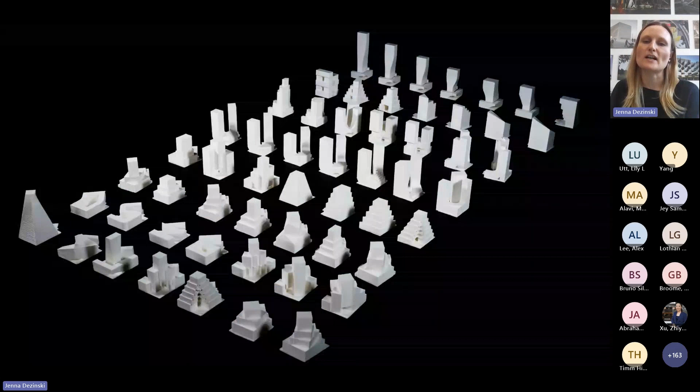I think this slide here is to talk about form giving, which is something that Bjarke talks about a lot. It's the Danish word for design, which means to give form to something that has not yet been given form. You can see here on the screen, part of Big's process is to iterate and test what it means to give form to different typologies.

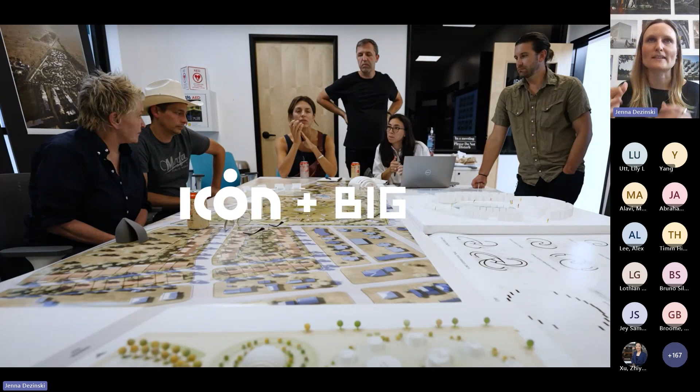With that in mind, I would like to start talking about our collaboration with Icon. Big has been working with Icon to explore what it means to give form to 3D printing for the last several years. I'm going to give you an overview of a few of our projects together. I've worked on a couple of them and not all of them. It's taken a large collaboration of many people here and many people on Icon's side and other experts. It really takes a whole group to get a project like these to fruition. So we're really thankful for all of our collaborators on these projects.

We'll start from the beginning, which is Icon's Project Olympus. This is the first project we really started on with Icon. It's a collaboration with Icon and NASA. Big has only been working on a portion of Project Olympus, but it's a collaboration on a lunar habitation, really imagining what a more long-term presence on the moon will look like.

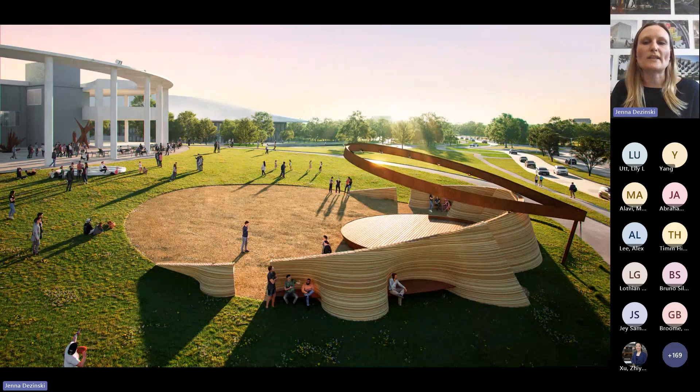Moving back to Earth, we designed the Cosmic Pavilion at the Long Center in collaboration with Icon and Liz Lambert. It was unveiled at South by Southwest in 2023. This project really showcased what Icon's 3D printers can do, creating an organic, undulating 3D printed wall that serves as a backdrop for performances. The wall starts from a wave-like shape at the bottom and ends at a pure circle, creating this undulating form that you see here on the screen and in the built final product. It also has this halo cantilever canopy that's used to support performances.

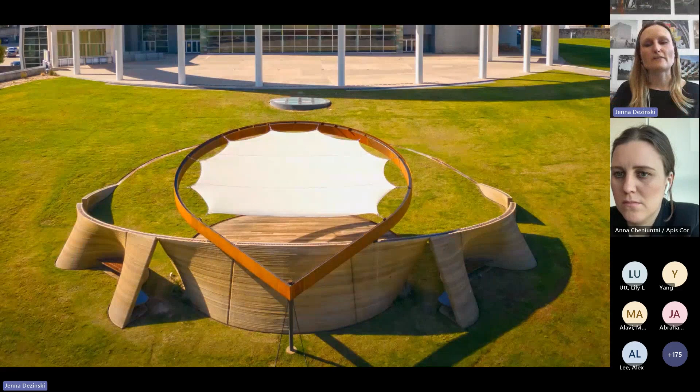Moving on, the pavilion you just saw was a precursor to El Cosmico, showcasing the unique and cutting edge 3D printed construction currently underway for El Cosmico in collaboration with Liz Lambert and Icon again. For those not familiar with El Cosmico, it's a hotel and campground located in Marfa, Texas, with an eclectic style and a very creative approach to hospitality.

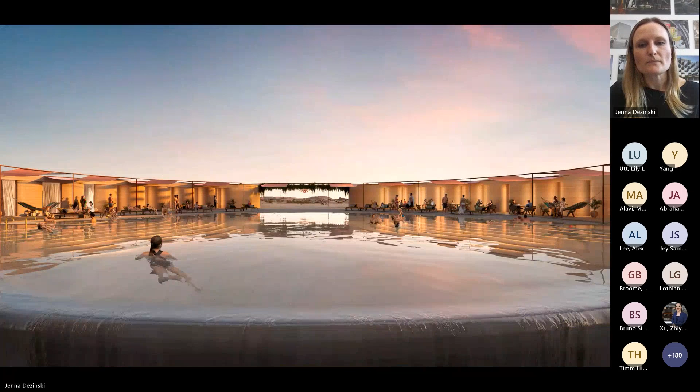So for us, we've been working with Icon and Liz on the relocation and expansion of El Cosmico to more than 60 acres that will showcase an entirely new architectural approach made possible by large-scale 3D printing, including domes, arches, vaults, and parabolic forms.

Also programmatically, what you see here is the new spa that will be there. There'll be new lodging, hotel lodging, new shared communal facilities still for camping, and a collection of Sunday homes.

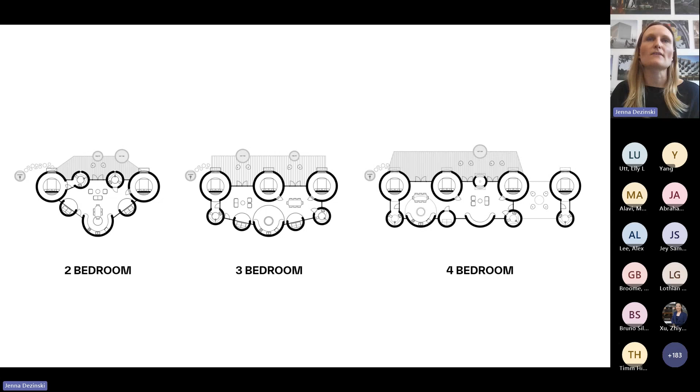The Sunday homes are laid out almost as a kit of parts, starting with a unique circular shape that you capitalize on and create with 3D printing to house the bedrooms and restrooms, laying those out in 2, 3, and 4 bedroom arrangements that create this interstitial space where the living and dining is. All of it faces north towards the view of the mountains.

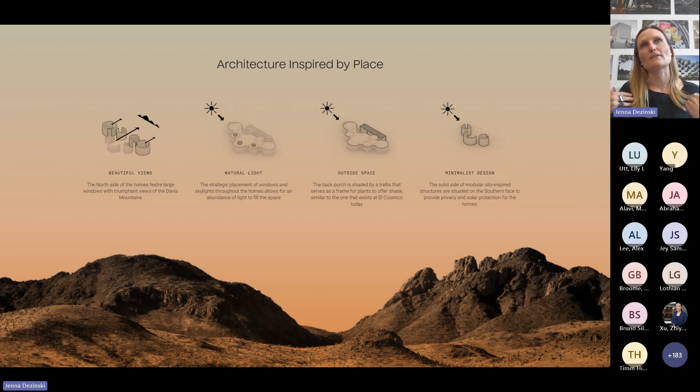It's really about an architecture inspired by place, but not just place - also by printing and the synergy of those two things. 3D printing is a very solid, heavy technology, so we're thinking of ways to use that for public and private separation, opening up to the views but closing where you need privacy, also orienting for light and sun.

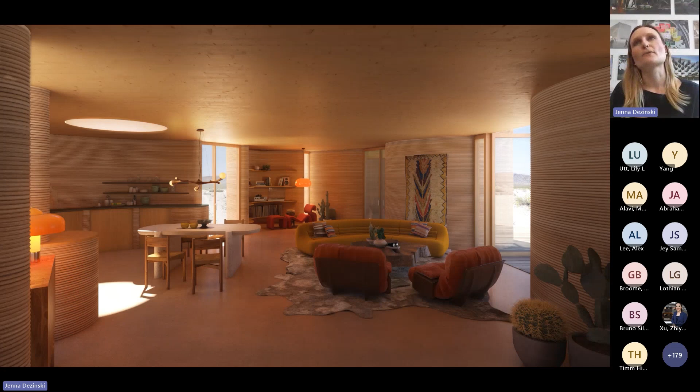This is a view of the interior of the pavilions, the Sunday homes, and you can see on the right the solid bedroom volumes. It's a unique nesting of program - you look past them through to the mountains from the public spaces of the house.

Moving on to the hotel lodging, this is an image of some of the hotel lodge typologies we'll have at El Cosmico. On the right is an Astrodome, a single unit. On the left, we have the Astro Spiral, which has both 1 and 2 unit sizes.

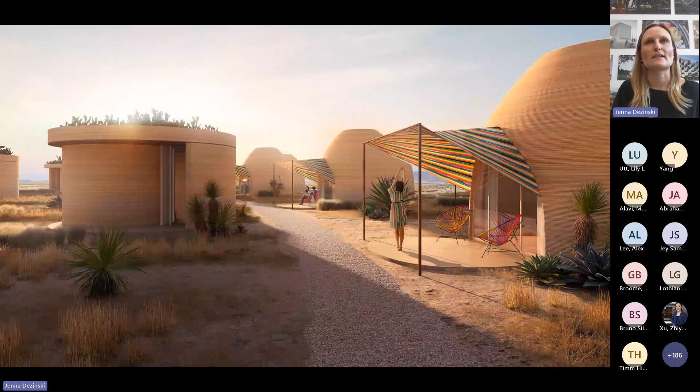This collaboration has allowed us to pursue formal and material possibilities only available with cutting edge 3D print technology. As Bjarke stated before, we're untethered by the traditional limitations of construction, site, and client with this El Cosmico. So we're very excited about seeing it come to fruition.

You can see with the Astro Spiral taking advantage of 3D print's organic form abilities to spiral inward, opening out from public and spiraling to the private, which is the bed here, and really coming down and creating that bed form.

And we've done that in various ways, taking advantage of the print's ability to come out and create seating and walls and countertop height throughout the Cosmico.

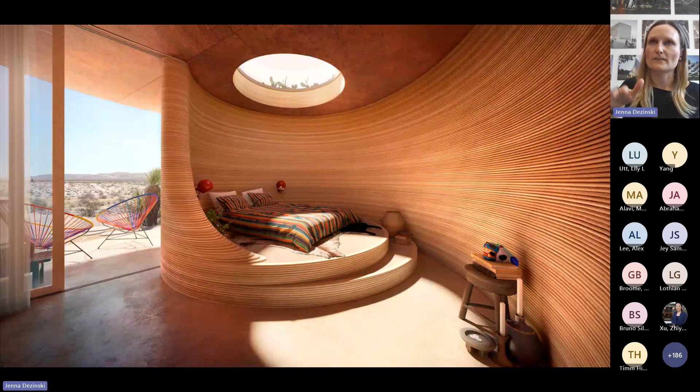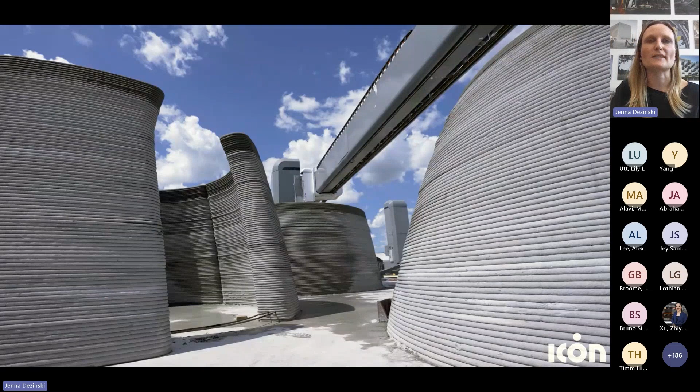This is a test print, a photo of a test print at Icon's facilities in Austin of the domes. And here's a view looking up.

I'm really excited about that. Moving on to the last chunk here, just to keep you for a few more minutes on the other thing in parallel. We've been designing and thinking about how to move 3D printing into residential and how to reimagine the single family home with Icon for several years now.

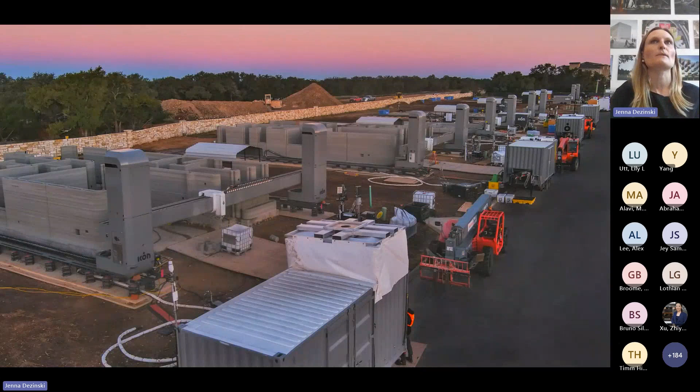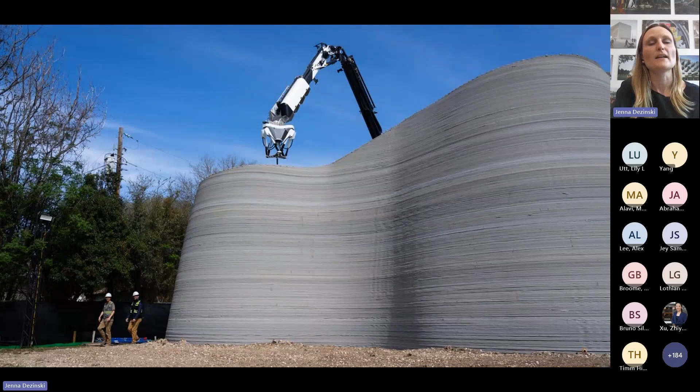There's two printers we've been working with in these designs with Icon: the Vulcan printer, which is a gantry suited for many types of residential projects, and the Phoenix printer, which was just launched at this year's South by, suited for multi-story projects and different site constraints. So really using both when appropriate.

The first one is Wolf Ranch. It's a community of 100 3D printed homes north of Austin in the city of Georgetown. The project was co-designed by BIG and Lennar with Icon. 95 out of the 100 homes are complete now, and there's 5 left.

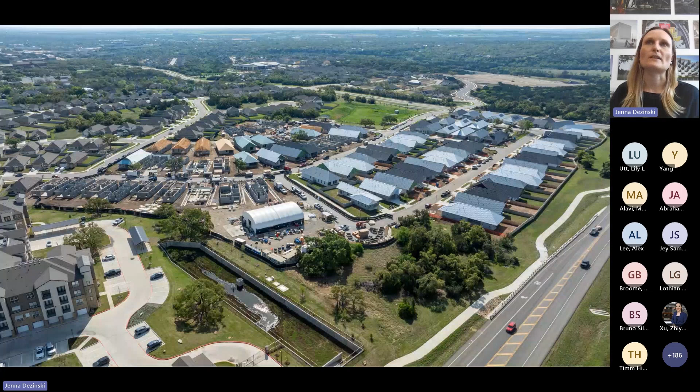This is a view in process. On the right, you can see the ones finished with the roofs, and then on the left, ones in process in an aerial view during construction, with several printers running at one time, which is one of the advantages of these houses in the way they're built with the 3D print.

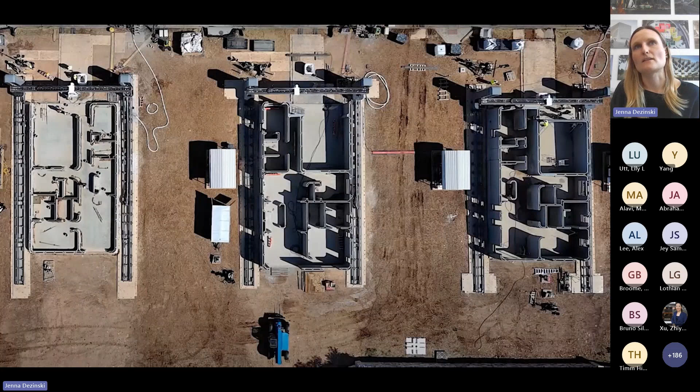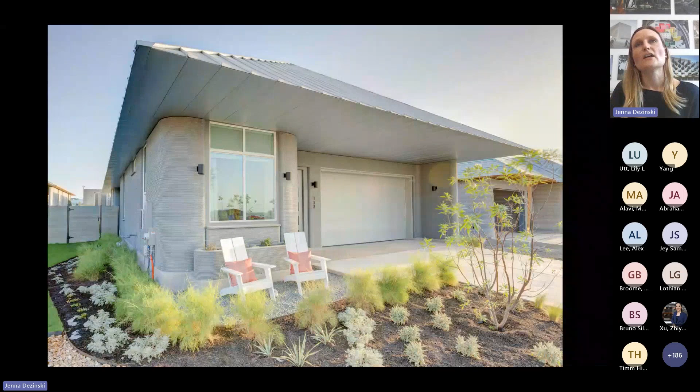A lot of what Big focused on here with Icon and Lennar was how to integrate 3D print with standard construction, like the windows, doors, and garages, detailing that and taking those details forward into future projects. On the interior, similarly, we thought about integrating millwork, the things you still need in a residential design, and how that can seamlessly interface with 3D print to provide a new look and feel, like with the island here, 3D printed as well.

Moving forward, the last thing I'll touch on is Wolf Ranch. We populated a master plan with a vocabulary specific to 3D print at that time, and that really got us thinking with Icon in a process that led us to Icon's Codex collection, thinking differently about the typical process of subdivisions and the possibility of creating a completely different way of organically delivering large-scale communities.

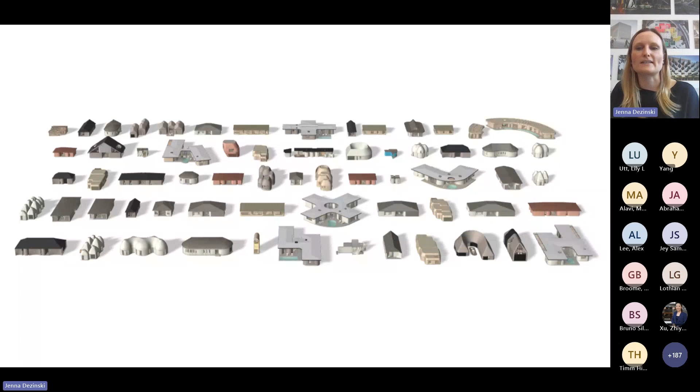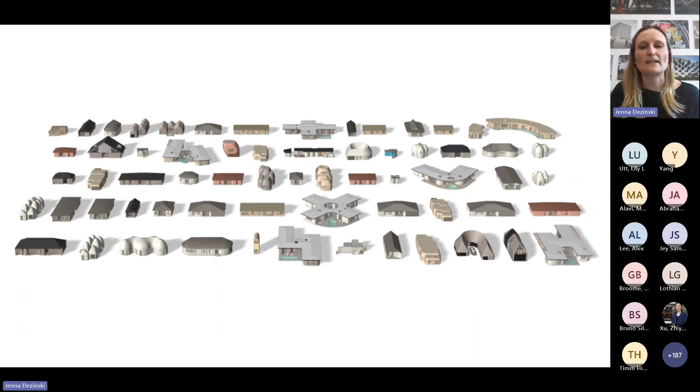Codex launched this year in March. It's Icon's digital catalog featuring more than 60 ready print homes across 5 collections, 3 of which were designed by Big, and we'll look at those quickly right now before I go over time. So the first of the 3 collections we designed...

was Texas Next, and it really is looking at traditional Texas typologies and how to innovate on them and reimagine them through the lens of 3D printing.

So this here is a rendering of the porch house design that we did with Icon, and you can see it on the left here. It has a full wraparound porch.

In the middle, we have Dog Trot, which is a traditional breezeway design, and in this one we really focused on using the 3D print capabilities to shape these breezeways, softening the edges and making a dynamic, inviting internal space, as well as layering the exterior of the house with curved forms that create storage on the inside, something you wouldn't see in a traditional speculative house for a suburban development.

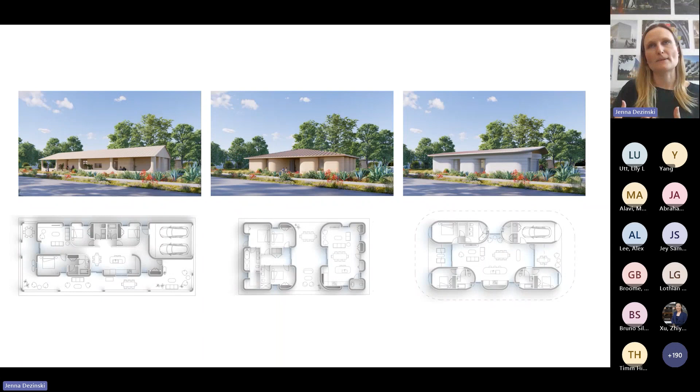On the right is our ranch house, thought of as a full through breezeway from front to back, porch house living too. We've got a front porch and a back porch, enhanced and supported by the 3D print, again using it for those private spaces to create volumes that frame the view, which you can see in this shot. It's the 3D printed volumes at the perimeter really giving shape to the space, spaced by those volumes and enhanced by some of the layouts.

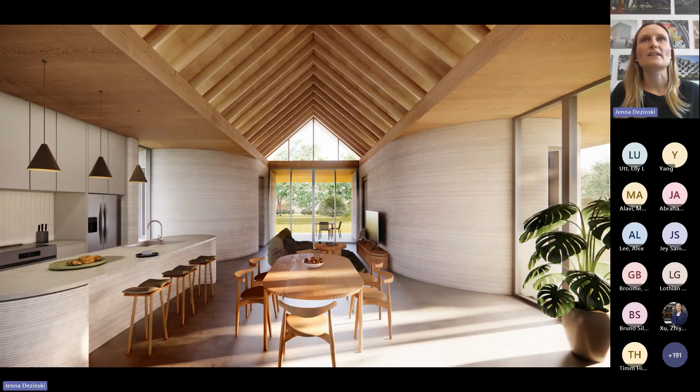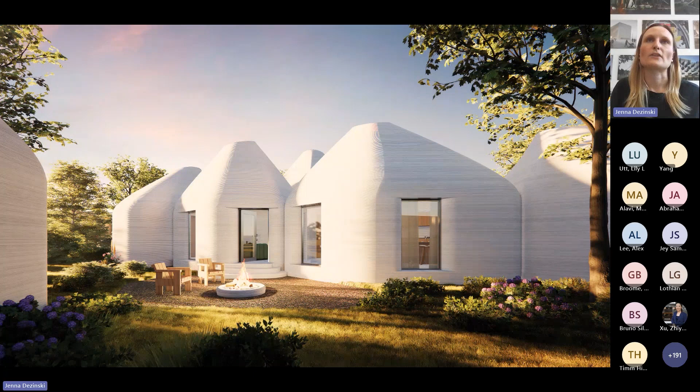You see a vaulted roof, and there's a couple of options actually for the roof on this one. The Storm collection was designed for hurricane and storm proofing with Icon, so thinking about aerodynamics—this is an example.

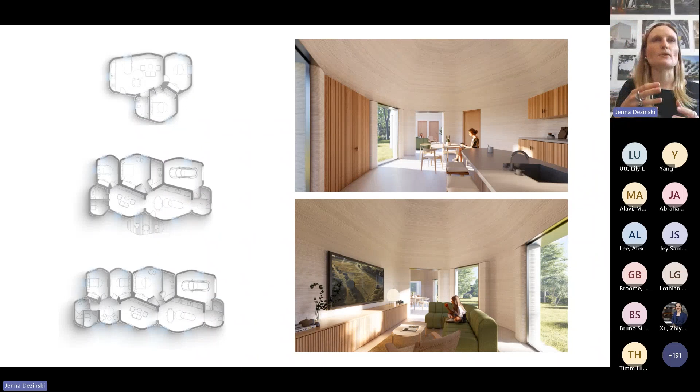Also thinking not just about storm but spatially about aggregation. This is a different way we looked at it with Icon, aggregating form. If you design your rooms, living room units and different units, you can arrange them, as we have here. You can see the top is like a 2-bedroom all the way up to a 3-bedroom, thinking of it almost as a kit of parts you can aggregate. This one is less pavilion-like and more like an enfilade, as the rooms on the right show in the images. Here's another example of that.

And then the last one to touch on is firehouse, so thinking about fire resiliency. Designing neighborhoods and areas that need fire protection, taking advantage of the unique fire ratings of Icon's wall system to create this fully printed design.

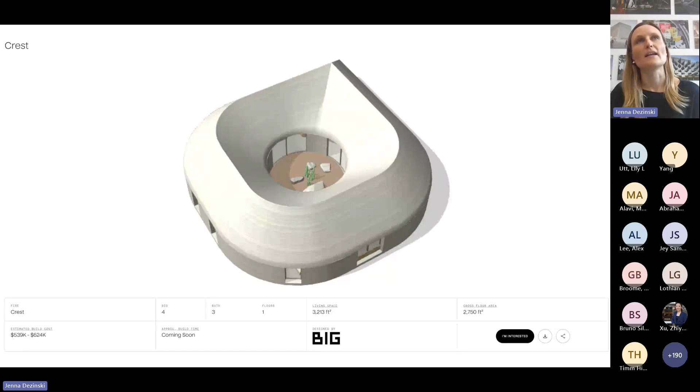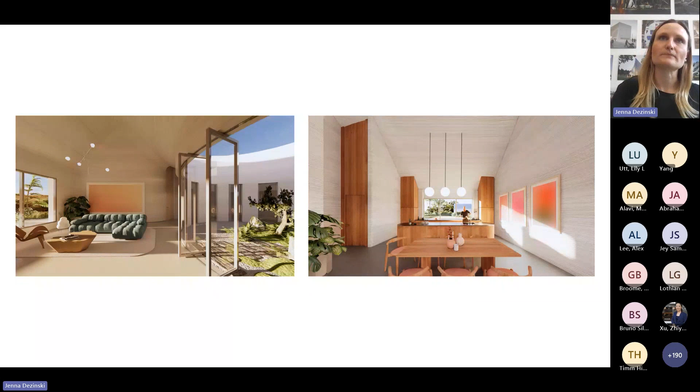The goal of Codex is to allow builders, developers, and home buyers to build with Icon quickly and affordably world-class architecture for everybody. They'll continue to introduce new collections, not just with us but also with other architects. We've been really thankful to be part of looking at how to revolutionize an industry that hasn't changed for quite some time, between the building industry and the way we live. It's been a great collaboration with Icon.

Thank you, Jenna, for such an insightful presentation. I really enjoyed all of the beautiful images, and I think I speak on behalf of much of the audience when I say it's truly remarkable to witness the diverse applications of this technology being employed today, ranging from single-family houses all the way to outer space.